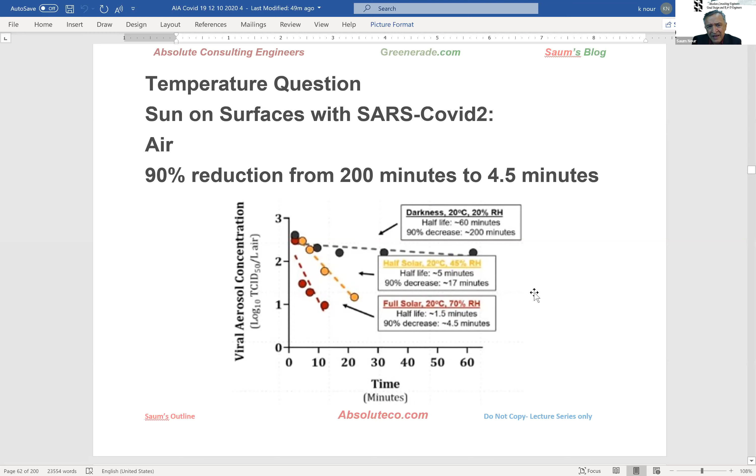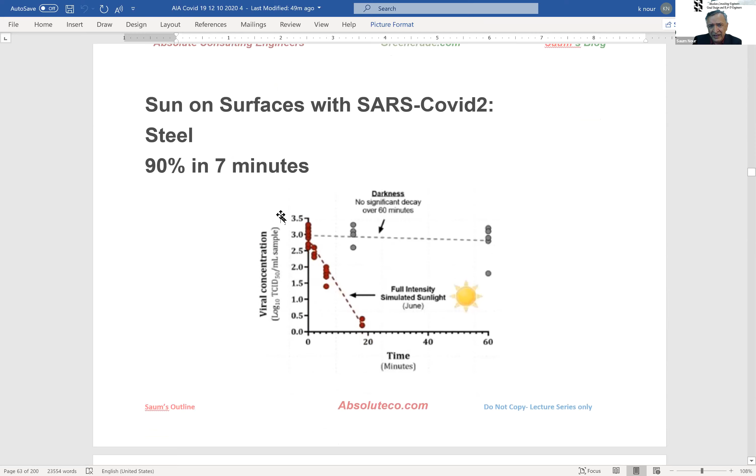There was one question that Brian Jeanette had about temperature, and I had to look for it. It was very interesting, dealing with the temperature within the body of a furnace versus cold. Really, at those temperatures, this virus doesn't do anything. But there was a study I saw that if the sun is acting on a surface which has SARS-CoV-2, 90% of it will be gone in 200 minutes, and the rest in 4.5 minutes, I don't know why they didn't go up to that point. And on a steel surface with the sun beating on it, 90% are gone in 7 minutes. That was a question I thought would be good to address.

This is another issue. I believe Rich Rowell was doing some things, I don't know if he's present at this time, but he was doing some things, and I wanted to bring up that we discussed the means and methods of the work, the items that have to be in the design.

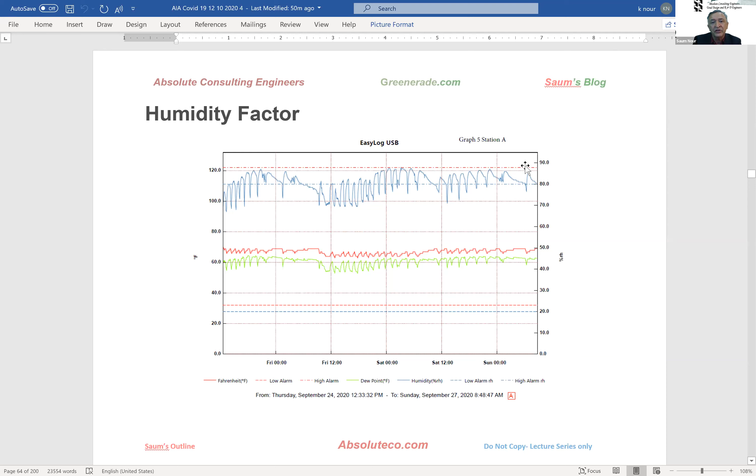The humidity factors, I did not discuss that much, but I have to tell you, especially if you're using all these Mitsubishis, or I use Samsung, etc. This particular system was a Daikin, and this was somebody's bedroom. Look at that, this person is anywhere between 70 to 90% relative humidity. Again, if that was an older person, he would have a heart issue, lung issue, and breathing issues. You have to watch out if you're using that type of system.

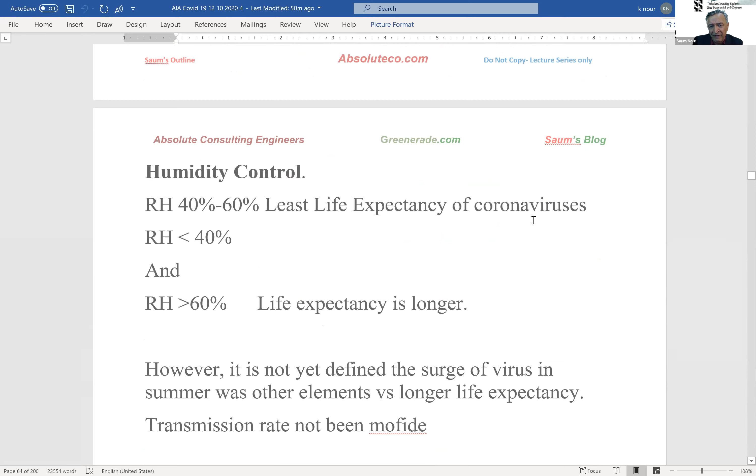What happens with relative humidity? The least life expectancy of coronavirus is at 40 to 60%. By the way, that's the range that all the electronics are made for. So if you're too humid or too dry, it affects all your electronics. Especially when we do data centers, we actually keep the humidity right at 50%. God bless the city of Los Angeles, this area is generally about 50%. As you get closer to the ocean, that number gets higher and higher. Life expectancy is longer if the relative humidity is less or more.

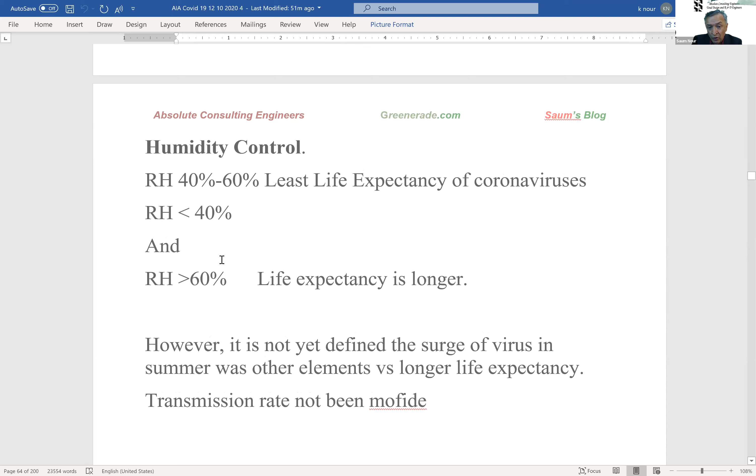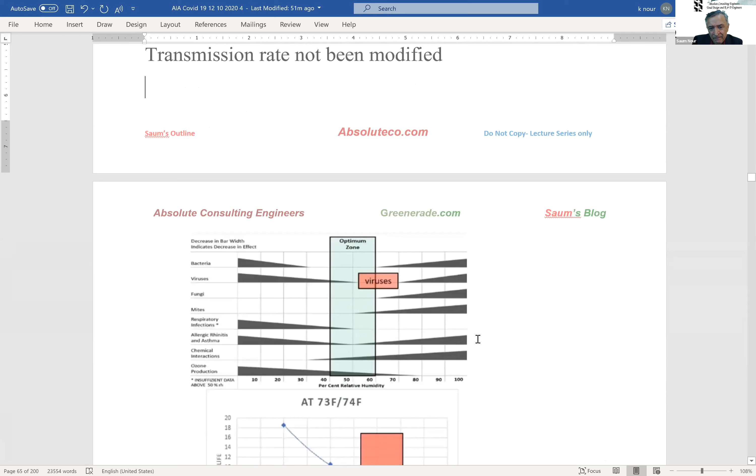So this is a bad, sorry, that was supposed to be modified. Thank you. This is the actual chart, the viruses are here, fungi are here, bacteria are here. This is the optimum zone, and fortunately, this is where our livelihood is as well.

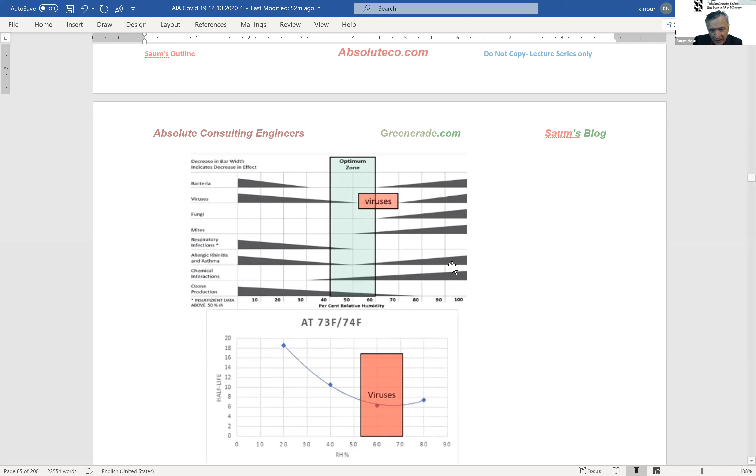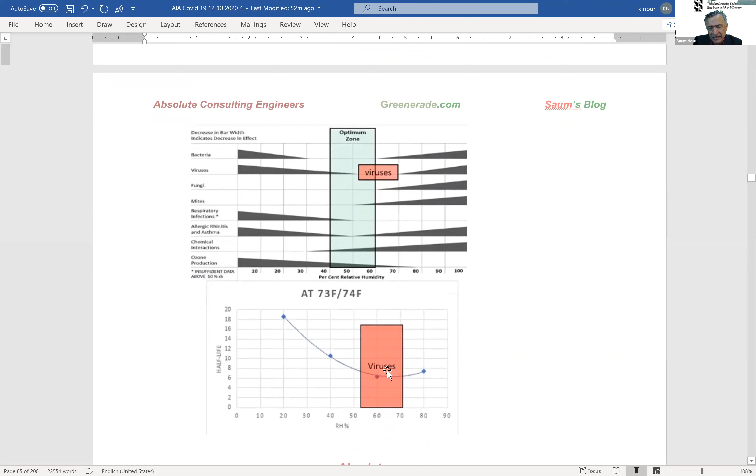Meaning that if it is too dry, you're going to get dehydrated. The water within our system, our eyes will get dry, you have to keep putting droplets. Or if you're in this zone, you're too cold, or at the same time too humid, like in the Bahamas or Louisiana. I worked in Louisiana, and I can tell you everybody only works from 5 a.m. till 12 noon, then goes home. It's unbearable. So this is the range where the virus is, and the half-life of it is the least at about 60% humidity. That's the zone. So humidity is a factor.

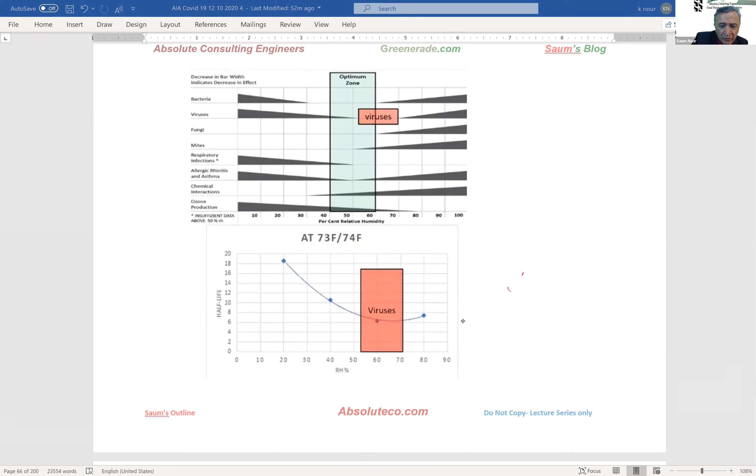I want to give you all this, I'll write it down. The unit that we actually purchased was by Dwyer. I used it for all my laboratory work. Dwyer is out of Minnesota... actually out of Arizona, and it's $154. You don't need anything else. The product is very, very good. You can measure it for 21 days. It's a very good tool to have, just an FYI.

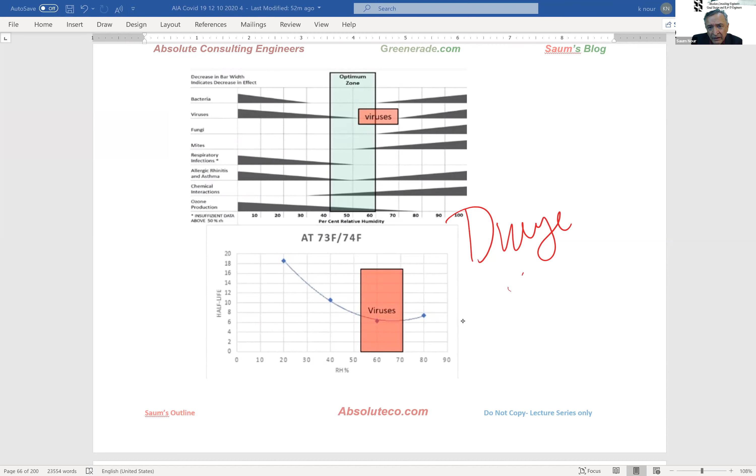My client purchased 4 of them, and we checked it out. There was one other issue that was there.

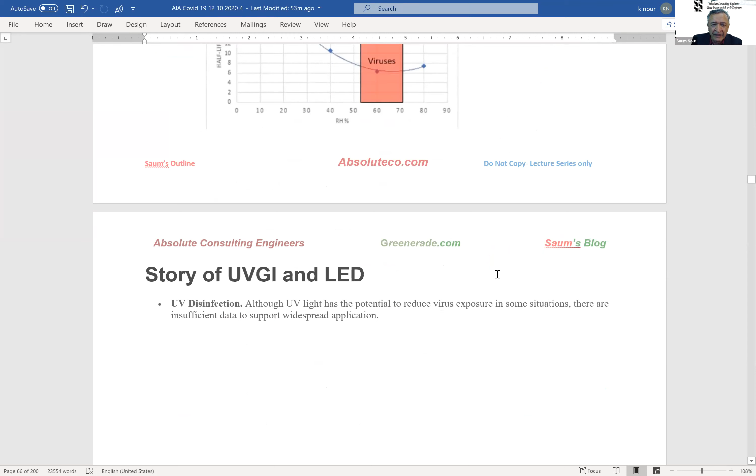I am, as a lighting guy, always looking for new stuff. Lighting is one of the parts that shines and makes especially the corridors beautiful, especially the foyer. I just talked to a client yesterday about wanting to spend money there. At the same time, I know Kelly sent me, I don't know if she's on this call with us, but she sent me some things.

One of the questions I had for myself was about LED and UV lights. Again, UVGI is the germicidal systems you have, which is UVC. And the answer is yes, you can take the diode and modify it to come out with any nanometers you wish. The irony was I checked out the price, I looked it up on Alibaba. It's not that expensive, it's very good. The only thing I did not check out was the lumens.

You have to have a contact time and what's called the energy level. Last time we spoke, we said in order to kill a virus you have to be at 661 microjoules per centimeter square. So if you apply this, you have to apply all that at the same time. I'm buying these from Alibaba, they come in a 50 meter roll, which is about 167 feet, or I saw one particularly at 190 feet as well.

So yes, the LED lights could be modified to have that nanometer output. I had a very good discussion today with Niall Saunders, who we do a lot of medical work together with, and he's very familiar with this.

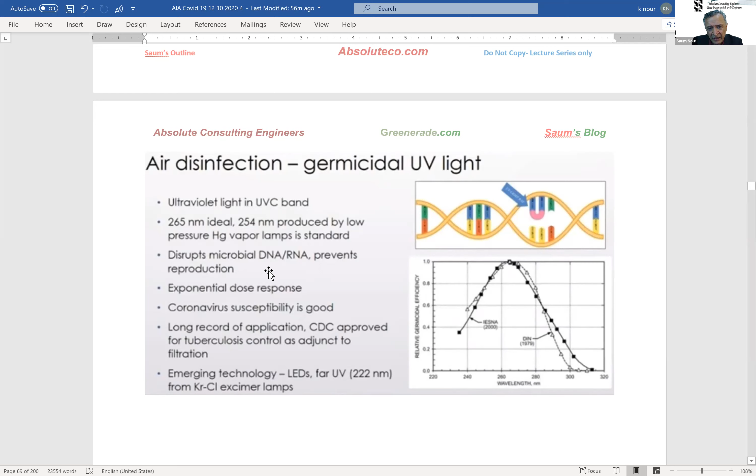But now this is what Kelly sent me. This is a Hubbell, we're not making sales here, nothing. All I can say is what they've done is the following, and I'll show you: when air conditioning comes, it actually comes through the ceiling. There's a lot of air in what's called the upper zone, and then there's what's called the people zone, which is the first 6 feet.

I'm 5'6", there are shorter guys and 6 foot guys. So that's what ASHRAE calls the people zone and the upper zone. By the way, UVC is not good for the eye and/or the skin, but what happens is it simply cleans up. That's one more means and method for you to get rid of the upper disinfection issue.

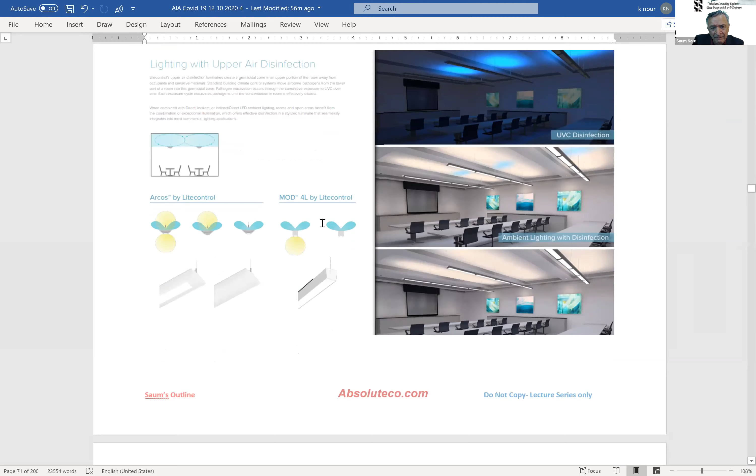And this was some of the samples that she sent me, and you can see how it behaves. So you have the lower zone and the upper zone, the people zone and the upper zone, and you have the wall sconces. I was doing cellular sites, I did a ton of them when we were working inside the hospital.

I spotted this again in a major open corridor, and I asked the guy about it—he said the Nurses Association asked for it. So these have been around, but now they're coming up in the market quite fast, and everybody's adopting it. Don't forget, you have to have the right contact time and amount of lumens or microjoules for them to be effective.

So these are different samples that I thought I should bring in. Again, this is the upper zone. This is something Bill and I were talking about—Bill was introducing some sort of robot system. There's a building he controls and I'm doing the engineering. You'd have this exactly like the robot that goes out and sweeps the stuff. It can literally go around overnight, sweep and destroy the germicide, and be done with it.

And this right here, Steril-Aire, that's the one I'm familiar with, but there are other companies, like US Air Conditioning. I went to a seminar about 20 odd years ago, and that's the one that goes within the air conditioning system and kills germs. At that time, they weren't so much looking at airborne germs—they were actually looking at the algae that grow within this bed. The irony is that this light, I've seen inside these things, burns so clean that it actually deflects and goes multiple into the other chambers as well, through the metals. This side is just the dry filters.

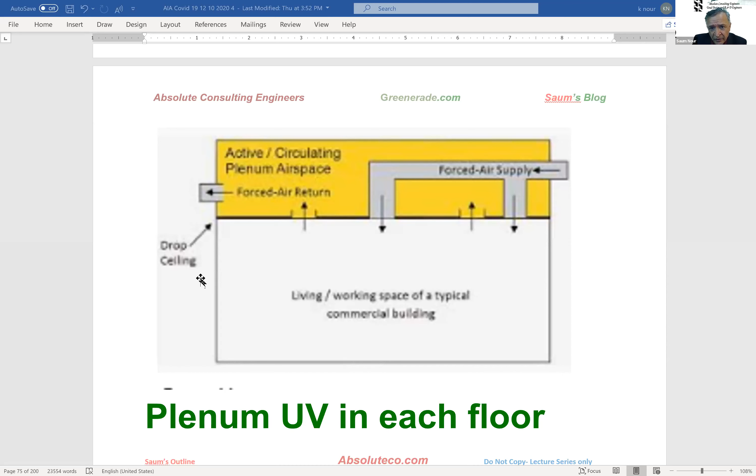What you do is simply create a corridor of lights, so as they pass through, they all get killed. There's another factor, another suggestion I have that we'll discuss in a few minutes. But again, no one says we cannot have them throughout the whole chamber. Every plate in this building—some are 12,000 square feet, some are 20,000 square feet. No one says we can't do those treatments in this particular fashion. Again, the floor is open and any suggestion is a good one.

This was unfortunate—again, I'm an owl or a vampire, whichever you want to call it. I was doing an entire video series all night, going through all of these, and there was one newscast I could not find. I was too sleepy to go back and didn't record it, but there was a newscast about how, around Michigan, the University of Michigan actually went to the high-rises and took samples. Guess what? They were infected.

The filters in the high-rises had COVID. So the issue is, is that true in high-rise A, B, or C? I don't know. But if they found this out in Michigan, anybody who works there as management, all the building engineers that go there, must go through a full PPE protocol as if they're going into a surgery. Because if these are infected, they have to be taken care of one way or the other—whether they're actually dirty because of dust, or they go there and sterilize them and put them back in.

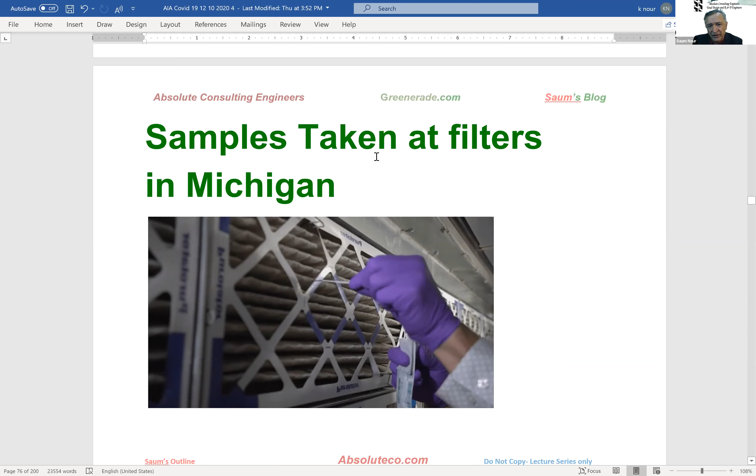Whatever they do, this was pretty scary, and unfortunately I wasn't able to find that video. I got this slide from somewhere else, but I just couldn't find the video to bring it up for you.

This is somewhat of a review, but some of the newest stuff I've identified for this group concerns outside air. Let's say, as we discussed last time, don't forget, HVAC units you buy today are only made to heat or cool about 50% of your incoming air, unless in an economizer mode.

What is an economizer? An economizer says if outside temperature is 75 degrees, turn off your compressor, open up your outside air and let the air come in. Okay, that's the economizer.

The issue is that if I am now advocating a 50% HVAC rule, you can kiss LEED goodbye, you can kiss the California Green Code goodbye. Those are all out the door. The reason is the amount of energy loss you're going to have means you're not going to get your Energy Star.

You may get a point for higher than normal, 30% extra air, so we will get a point for it. I am also a LEED authority, and I have 2 buildings right now. We just submitted one recently.

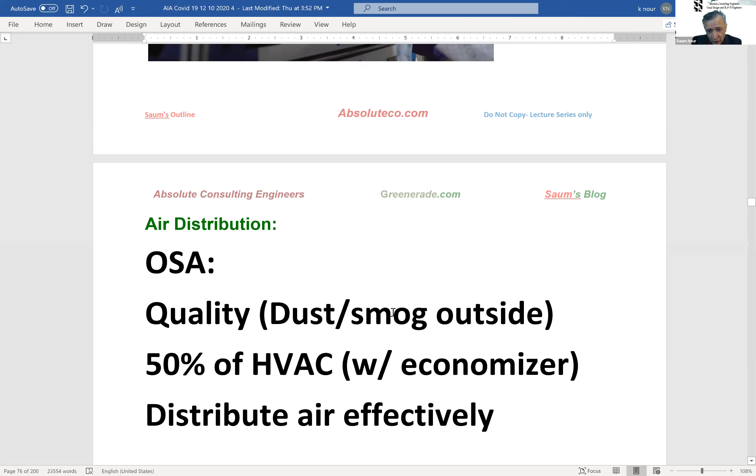But again, outside air, that's one issue. So if I'm going to bring in 50% day in and day out, am I going to bring the California smog into my building? The answer is yes. Right now, the majority of them don't have a lot of filters, they just open up, or they have a dumb filter. You've got to put something in there.

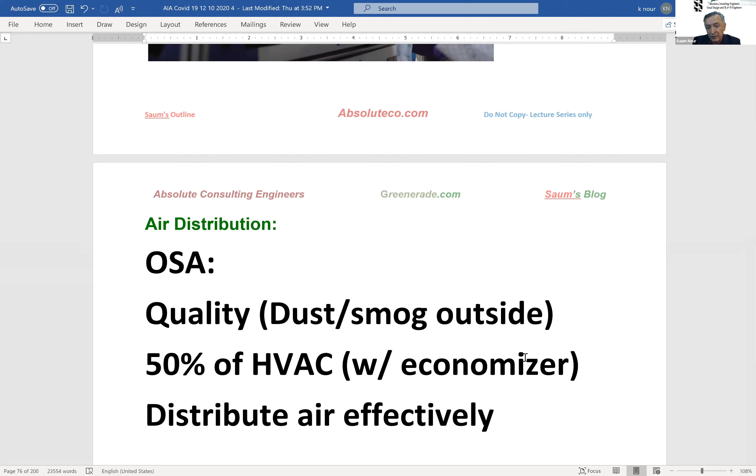The other issue, now that you've got it in there, you better distribute it effectively, which is the next slide.

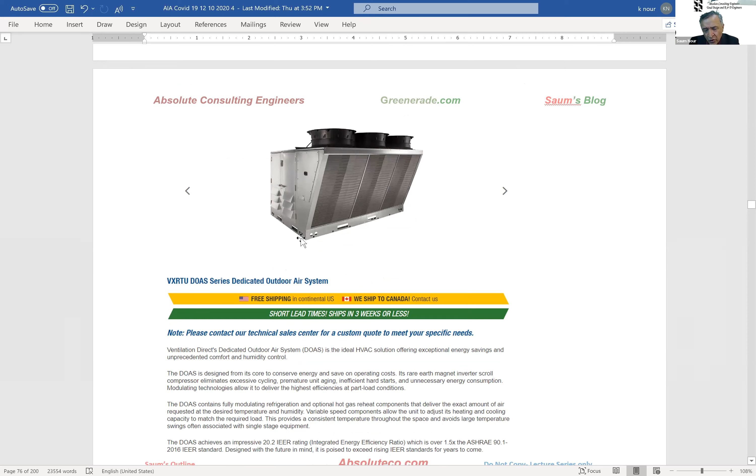Now, in a situation where you are more north, like north of Santa Barbara, toward the Frisco area, the weather is too cold and you're bringing all that air in, so you've got to condition it. This goes up to 100 tons of air conditioning. If you have to do it, you've got to condition and bring it in. Might as well clean the filters and put all these elements in front of it before you bring it in.

This is literally just a dedicated outside air system. It's called DOAS, by the way, in the ASHRAE world.

So, I did talk about this restaurant in China. I'm going to go through some examples. I didn't know there were so many studies on this, to the point that CNN and other groups have done animations of this. This is where 73 people were there, and only these 3 tables got it, and for whatever reason, they called it a poor air conditioning system.

No, the air came through here and left to there, and apparently 10 people got infected. We don't know how many people died. And this was another paper. When I did the search, there were all these different animations and studies that have been done just on that restaurant.

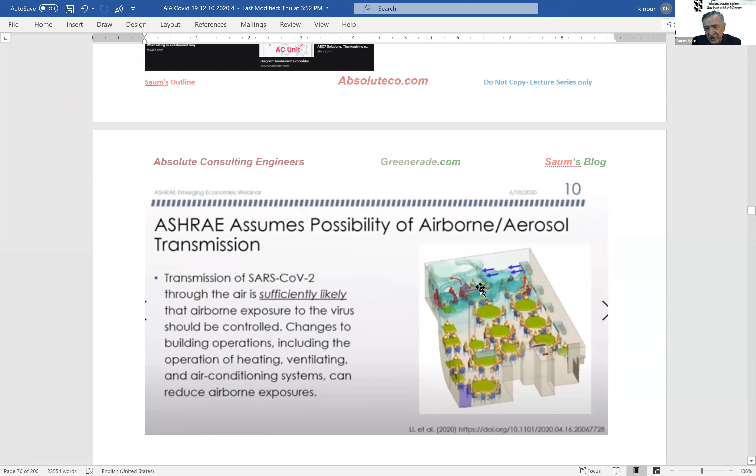So let's go back. This is an ASHRAE study of that, and they were doing an animation of it on their own. Just to let you know, that was a very popular study. This particular study is very interesting, it has different elements to it.

This was a call center in Korea. What was funny, let me give you some of the statistics - apparently 2 of them are there. I didn't know if they were the same, whether this was in China or not, but at least for the China one, these are the numbers, and I have another one in Korea.

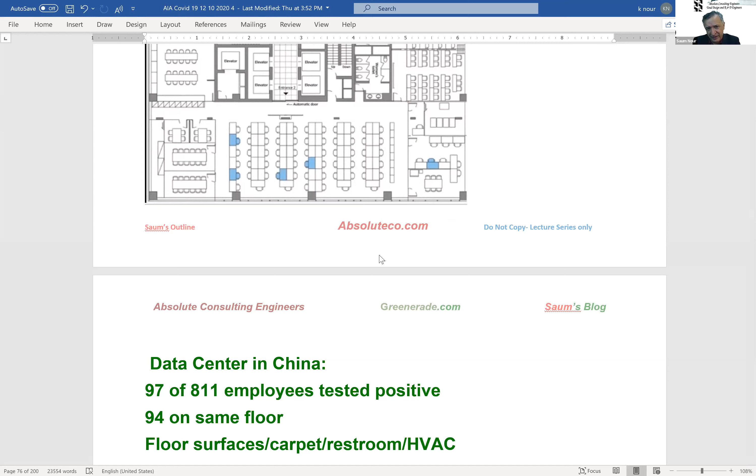The irony is that this was a bank of air conditioning. My proposal is the following: put as many air conditioning units as you can, one per zone. In one of the Orange County cities, I have literally like 30 units, I put a 44-ton system, and at the end I'll put 88 ton. Each one of the 44-ton units will be carrying about 64 zones. Just about everyone will have their own zone.

Therefore, they cannot cross-contaminate. At that point, if you look up Michio Kaku, he says, what happens in 10 years? We'll have the phone system somewhere in our glasses, etc. You won't go see someone in person - you'll see them through your eyeglasses, the new eyeglasses you will have, or maybe inside your contact lens, they will all be there.

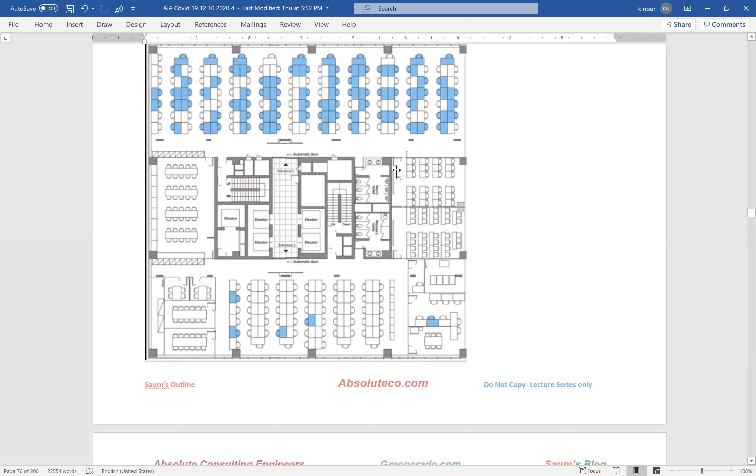So what is happening is that all these individuals picked it up, not this 5. This 5 actually got it possibly through the restrooms or other contacts that they have, which is why I have some slides created for that.

So this particular one, I do not have the death rate, etc., but they are assuming these others could be air conditioning system, possibly contacts, whatsoever they had personally. But these five, they're simply saying it was different means and methods and substances.

So let's move on to dilution of outside air. Let me give you this. This was a European paper somewhere in 1993. What happens is if the dilution rate, you give more. Now, let me go back to you guys, or the architect—CBC simply says 15 CFM per person, and goes to the California Energy Code, which also says 15 CFM per person.

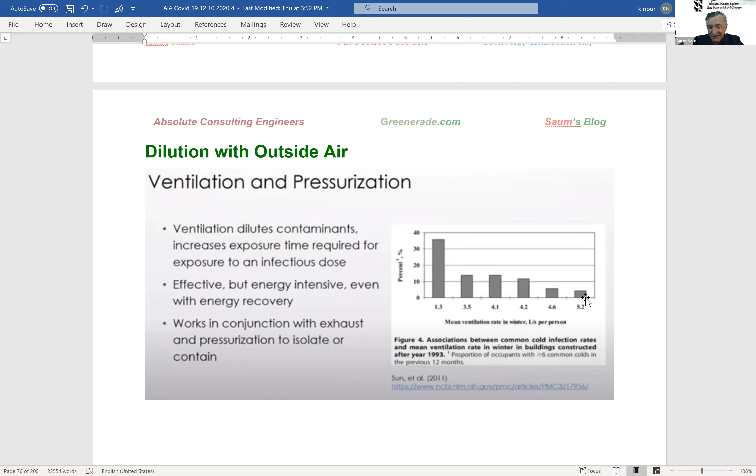So we are combining all of these in a utopia world that you guys are going to design and we will engineer. We will have all of these, and I am not going to fight over an air conditioning location for you guys, because you're going to give it to me, and you're going to make the buildings taller and wider, whatever you're going to do, because I will be worried about the infection rate as well as the owners.

By the way, if you all remember, in 1994 I was getting my CFPE in fire protection engineering at UCI, and they were just simply going from what is called 6 air changes per hour to what was called smoke control. Atrium was one of the biggest elements. Guess what? During an atrium, the entire building is 1 atmosphere. Remember, we talked last time about NFPA 101 as our savior to understand how to compartmentalize different parts. Now, when you have an atrium, the entire building becomes atrium.

The irony was, I did a project in Washington—I forget which, Benetton or one of the stores—and it was an atrium, around 1998 or so. I simply said, oh, let me see how they did the smoke control. Guess what? When you go to smoke control, they said, oh, we revert back to the 1994 code, and they never applied that. So I had my jaw on the floor.

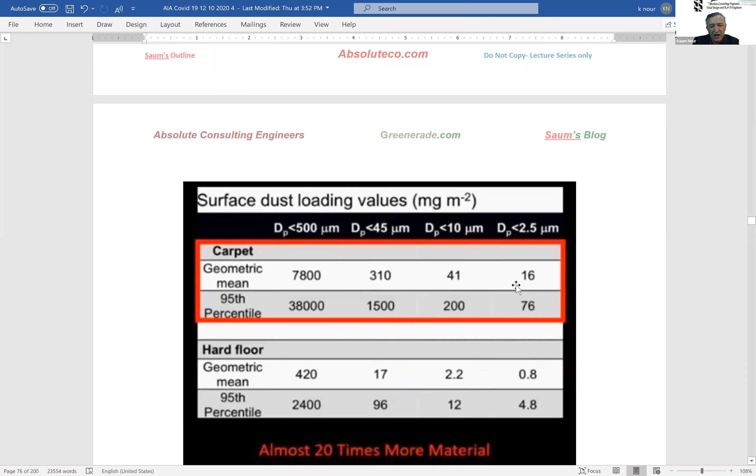Somebody did something. There was another story—if you recall Saum's theory about surface roughness, etc. You remember, if you have a carpet versus a hard floor, you're going to collect more than 20 times more particulates on your carpet. Again, going back to the main concept, we had the 1950 paper that simply said you have to have all these rough surfaces so that...

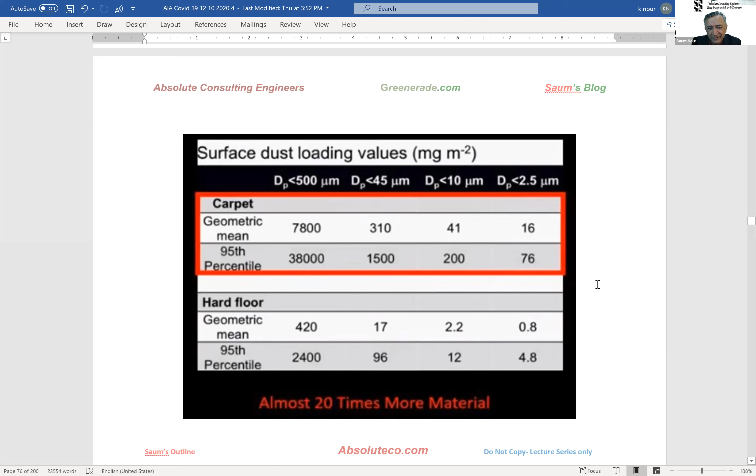Somebody does not have their mute on. Testing, 1, 2, 3. Thank you, somebody. Anyway, that was me, Saum. I'll keep checking, no problem. Thank you, sir.

Anyway, that would be the dust control. Again, dust is a carrier. COVID—these are all particulates. And we talked last time that the way the virus actually comes out of our mouth is through the moisture that comes out. And we showed the composite of it.

And we simply said do not use bandanas with 1 ply—everybody says at least use 3 ply, and if you can find N95, use N95. But regardless, the most critical part is that the carpet will actually pick up 20 times more. Therefore, that becomes your source of intake.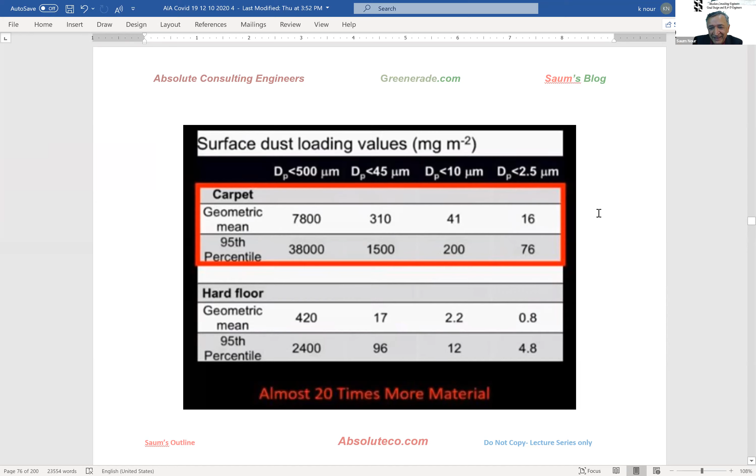And again, my DNA was in stone because my father was in stone. And again, you want to have the joints to be as minimum as possible. And I did my home, and somebody called it a mausoleum.

But anyway, I got so much marble there.

But anyway, let's go back to the Saum's theory. If you have this, you have to have this as a part of maintenance. And nobody knows if these are contaminated from somebody. And don't forget, by the time a person gets infected, it'll take 3 days before it actually appears on the person. So all of these could be from an asymptomatic and/or a person that will have to go to hospital. In either case, taking care of the floors is an issue.

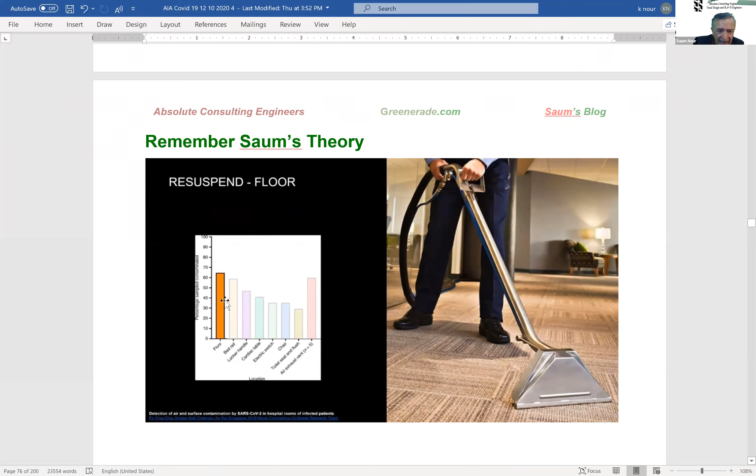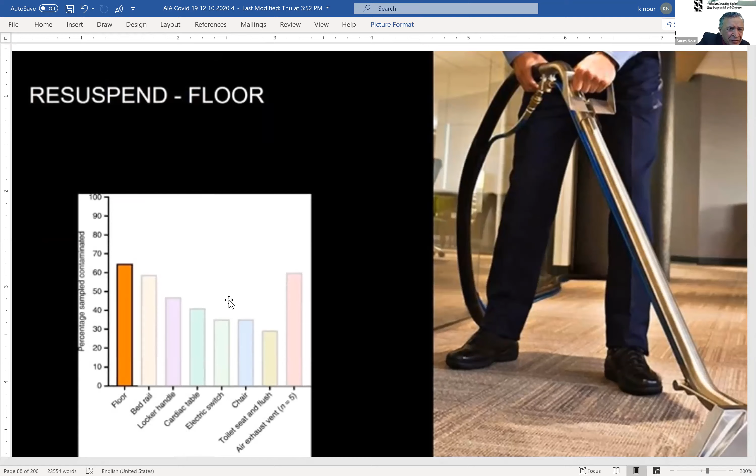Here are the actual percentages. It simply says the percentage of samples contaminated from bed railings, locker handles, cardiac tables, electric switches, et cetera. And these are quite extensively done in the hospital environment.

I have a little micro quiz, and you will answer it for yourself. What is the number one contaminant that is carried between one room to the other? Just think about it, I will give you 1, 2, 3. And if you said the mobile phone of the doctor and the physician, that would be the correct answer.

And if it was my class, I would have to buy you pizza, because that was my statement. Anybody whose phone comes on will buy the pizza.

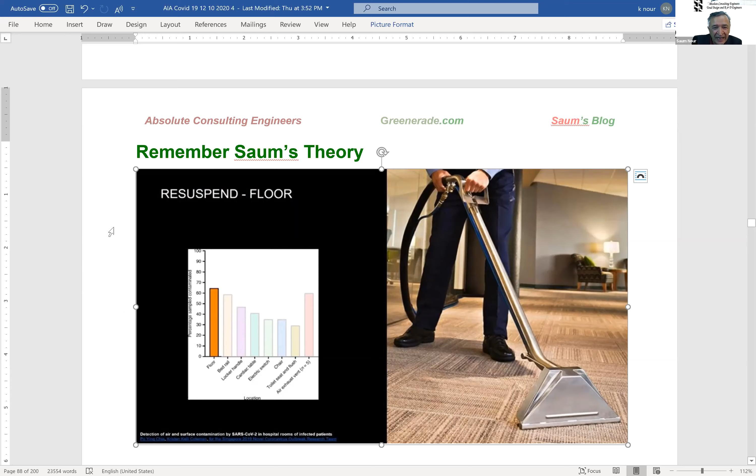But anyway, again, we go back to the Saum's theory, and I never knew I was going to use my master's and PhD thesis in this discussion. Filtration. In one of the buildings in LA that we discussed, we actually priced MERV 16, which is available in the market. The price is extremely high. Now, MERV 13 is the code, you have to have it, so we'll stay with that.

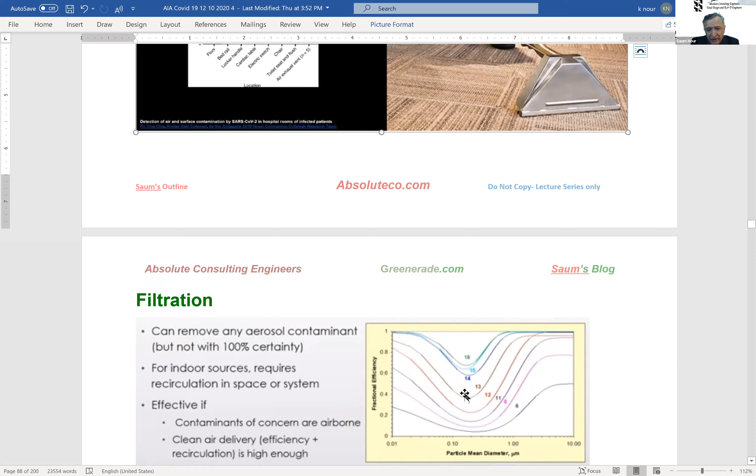The issue is that you have to have the UV, the carpeting, and all the other items that we talked about, and we have to go with a bipolar ionization that is next. But ironically, look at this. The 0.12 micron, where the coronavirus is, right around this region, that's where the efficacy is lowest, unfortunately. So 13 is there, but I'll tell you what the bipolar does, what BPI does.

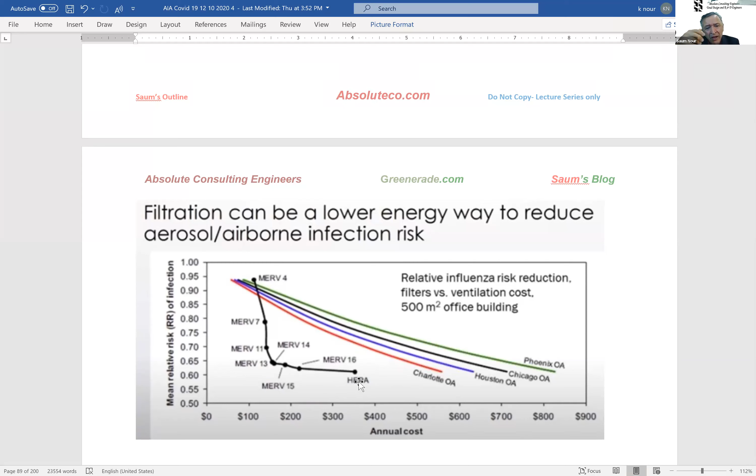So filtration is very critical, and these are the number of studies that have been done that simply show if you spend more money on your filters, your expenditure on influenza risk reduction, or the time value of the money of your employees, will be far cheaper. Now, HEPA filter is very good. However, as you go with more pleats of the paper, the static pressure of the system goes out to the moon. For now, we are going to go with MERV 13.

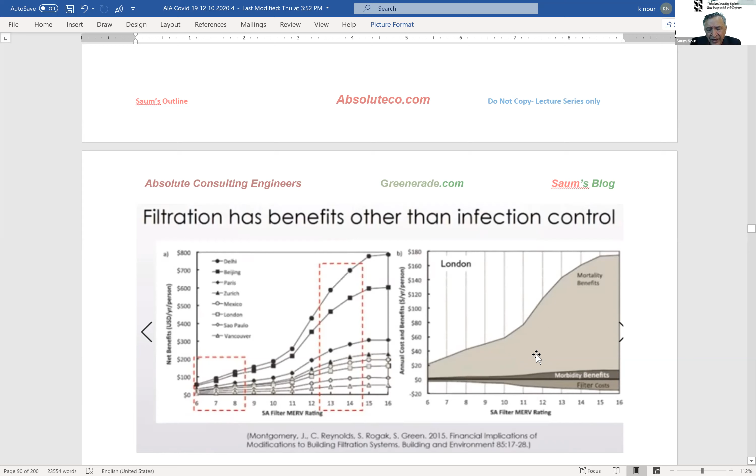And again, this is another study in London, where if you go with MERV 13, the filter cost is here, the mortality rate benefits, or morbidity rates, are here. So it is a good thing to do. By the way, we are MERV 13 anyway.

God bless the state of California and the gringos who've done it. The people who wrote the green code, they were all gringos.

Let's go back to work. Are we going back to work? Well, let's build the entire hospital in an IKEA style in 2 weeks. And that's what happened here. I was looking at field hospitals right now in Nevada, in the parking lots of the hospitals. Some of them are in the streets. In this case, you had it in the gymnasium in Madison Square Garden, et cetera.

This would be a factory setting if you have all the ABCs of the world, and these guys can actually work with the gloves, et cetera. This could be tomorrow in California or somewhere else. The problem is back to work indoors.

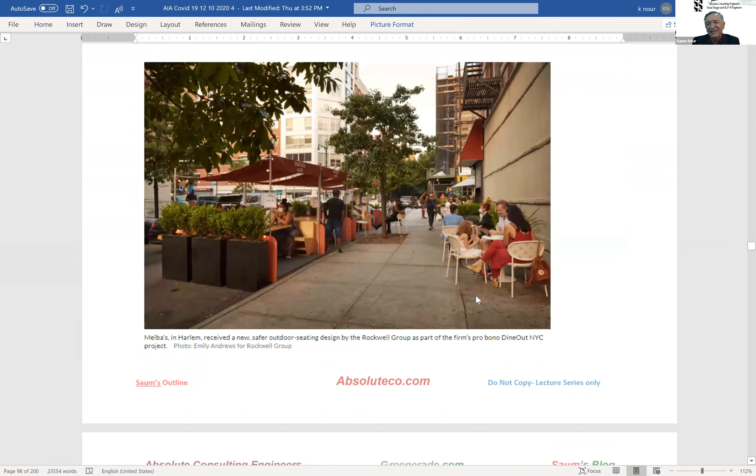I know they're trying. I guess you can be in Rome, have your lunch outside and you're still outside, or you could be in New York City or in Los Angeles. Now in Los Angeles, these are banned. And in New York City, the irony was somebody literally took studs and drywalls, etc. They built another space outside and they called it outside. I could not comprehend. I'm just too dumb.

And by the way, I could not find, I do have some photos. I'll put them down. I was a hippie. I had hair up to here and all that. By the way, I had hair. That was the good part. And anyway, I was a car hop. And because I had my own dance, I made more money than my brother doing roofing and shingles.

I guess this is our new, we can take our dates like we did in 1972 and go there. We are talking about restrooms. Could we have this? The answer is no. There's no way. And I simply took some photos every so often. By the way, is that from there to there 6 feet? No. Would that separation, this right here, would we have to modify this? And that would be my proposal.

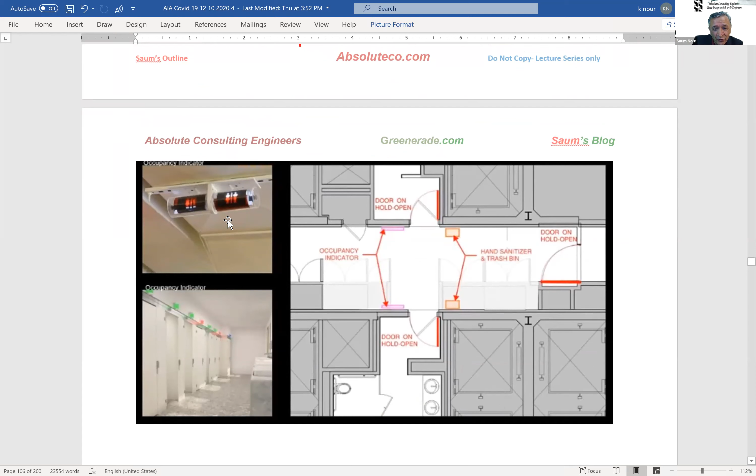By the way, if you recall, if you had that, what was it called? Single, unisex, if you recall. They were going to mingle all the sexes into one. My daughters were going to school in LA, and one restroom was converted there. It was wow. I just went to the other floors. This is the format. If you go to Costco, to gas stations, you know which aisle is open and not open. These are all the indicators, so you will have them.

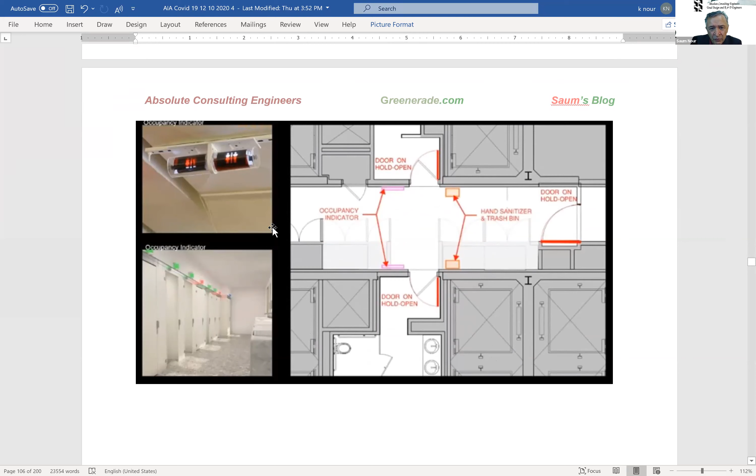Because to me, restrooms are one of the most congested components that you have to go, and you have no control because you have to have it, etc. So you may have to have all of these. Every one of these systems will be all touchless, as well as all the components. By the way, all the faucets, etc., during the Ebola became touchless. That was the time that it just went up. And I pray you guys don't use the battery-operated ones because there will be other issues. So anyway, that's the restroom issue.

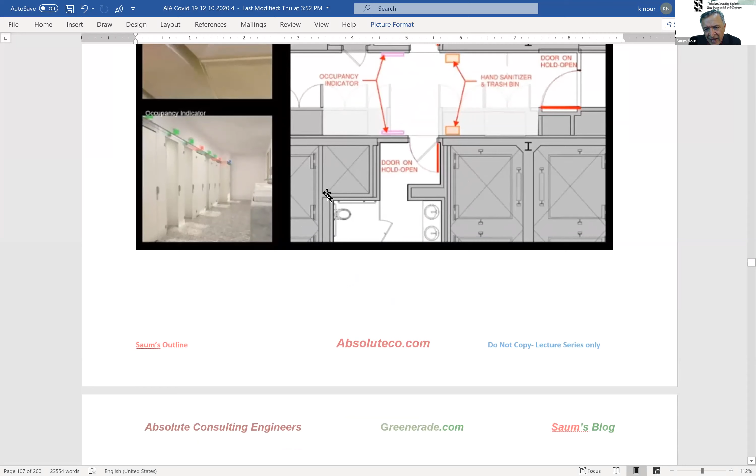However, remember the following: the exhaust rate, you have to upsize it. Today, one of my clients was like, what are you doing? You're putting 14 air changes, et cetera. I said, sir, what do you want? As long as you give it to me in writing, I'll follow the code verbatim. So he did not want that many air changes, and he called it a hurricane. But what is happening is as follows: that high rate of exhaust is about 10 air changes.

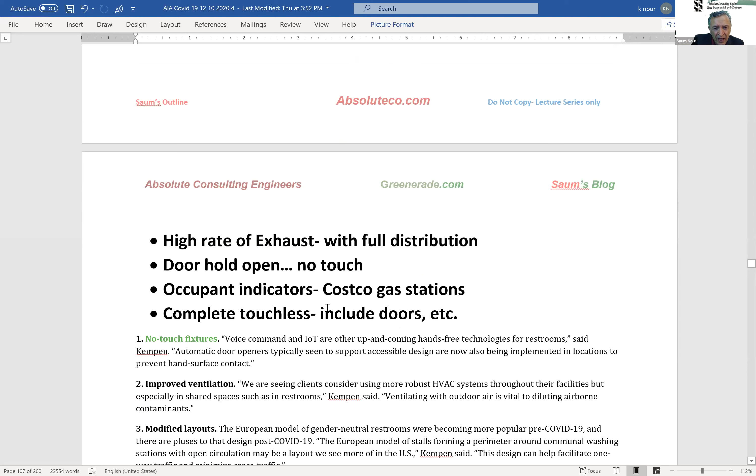Now you can't have just simply an exhaust duct here and let everything go. You want to have what's called laminar. What is laminar? Layers. You want to go in layers. And by the way, when you do a hospital bed, they are in layers, right? You want to have the doors be all no-touch. And then at the same time, occupancy indicators, like I said, in the Costco gas stations, touchless, et cetera. And I liked this concept.

And then I had a conversation with Niall this morning about the antimicrobial finishes. One day I will give the floor to him. Maybe at the end, I will let him chat over this issue. I actually worked with a guy who was an inventor of the Venetian mud about 10 years ago. In fact, if I take this background out, it's Venetian mud, a full-blown green room. And he made some models for me. And we were looking at germicidal aluminum oxide to be added to the system, or copper added to his product. It would have quote unquote antimicrobial properties.

Why did I bring up copper? Because the life expectancy of COVID on copper is only 4 hours. Paper is 24, cardboard is 24, steel and plastic is 48. And that's why when you go to plan check, they will not touch your plans for 24 hours. And that's why you lose 48 hours doing this.

Anyway, extremely high finishes in china. And china, I don't mean the country of China, I mean the material of china. Toto came out when Ebola was there with finishes, saying our china has finishes so fine that the microbial hills and valleys are technically gone, especially for cases inside the hospital where you have to have full isolation. So that's what I meant. China, not mainland China, and not Taiwan either.